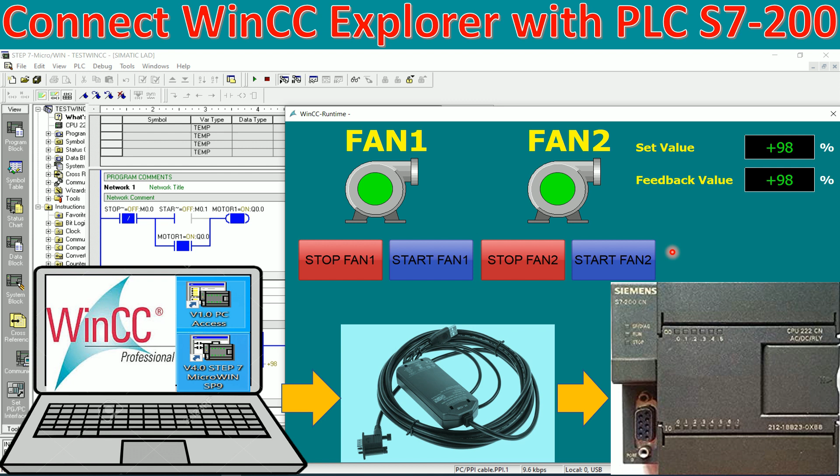So let's go to our software. I will explain more as we go step by step about how to create the project and how to create the OPC tag on the PC Access. Let's go together with me.

In the previous video, we already learned about how to connect the PLC S7-200 Smart with the WinCC Explorer, using 4 software. The first one is Step 7 MicroWin Smart, second is PC Access for S7 Smart, third is Kepware Server configuration, and the fourth is SIMATIC WinCC Explorer Professional.

But for this video, I will use only 3 software - this one is not used. So I will use Step 7 MicroWin version 4 SP9, the second one is S7 PC Access version 1.0 - this one not used, we use only with the PLC S7-200 Smart. So I will use these 3 software.

So basically we can go to create the project on Step 7 MicroWin. I will create the new folder, named Connect WinCC Explorer to PLC S7-200.

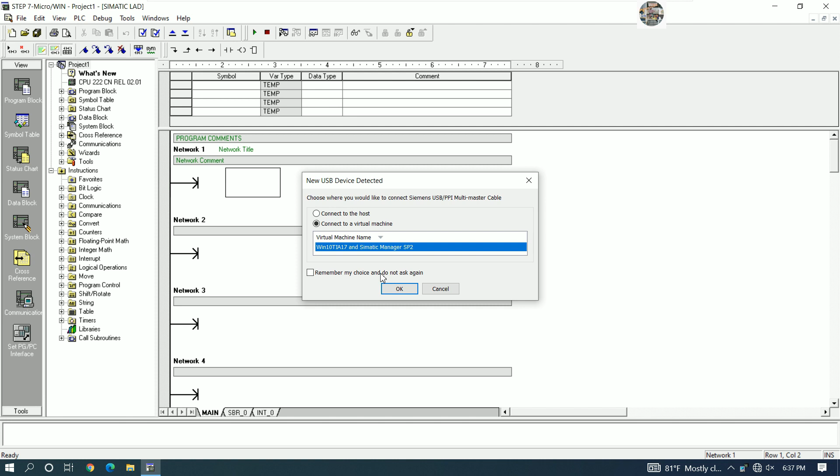Let's double click on Step 7 MicroWin version 4 SP9, and we need to check the communication between our PLC and software. So I will connect the PPI cable from the PLC to my PC. Then I will choose the virtual machine, because right now I use a virtual machine. Next step, we need to check the Set PG/PC interface.

Let's go to PC PPI cable, then go to property and choose USB - make sure we use USB. If everyone uses the COM port of RS232, we can also connect with the COM port, but for me I use USB.

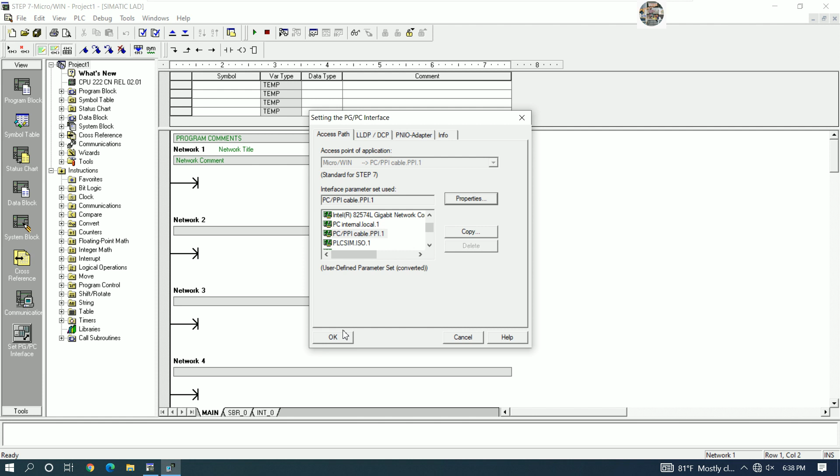Then click here to check the communication, double click to check the communication between PLC and PC. Right now it detects one PLC, CPU 222CN, version 2.01, address 2, and baud rate 9.6 kilobits per second. So that's okay for communication.

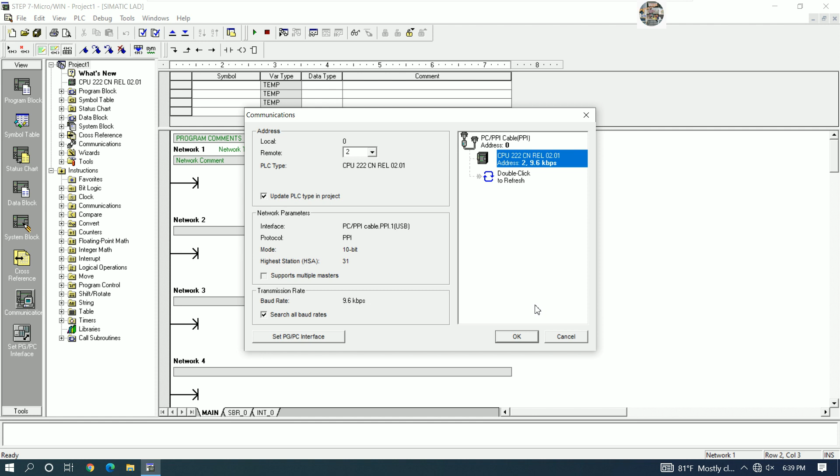Then we will create the sample project - sample start and stop the fan that I already showed here on the slide. We have two fans, fan 1 and fan 2, and we have stop fan 1, start fan 1, stop fan 2, start fan 2. So I will go to the push button stop fan 1.

So I will start from M0.0, and for start I will use M0.1, and for the output I will use Q0.0. I will hold the signal by Q0.0. We need to define the symbol for M0.0, M0.1, and Q0.0.

So for example, I will define the symbol as stop fan 1, and this one start fan 1, and this one fan 1. If we compile, it will automatically assign the symbol that we already put. So here is the fan 1.

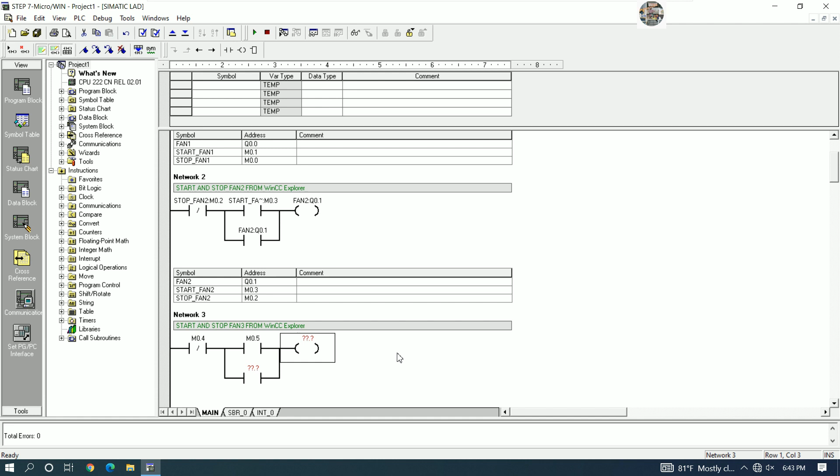So I will add until fan 3, yes, fan 3, so we can copy one more for fan 3. Okay, fan 3, so I will use NC, NO, coil, and one more for NO for hold the signal. So this one I will assign as M0.4, M0.5, and Q0.2, and this one Q0.2.

Okay, and we can remark the symbol stop fan 3, start fan 3, and this one fan 3. Okay, and we can compile. Yes, good, there is no error, right?

Then we have one more for set value and feedback the value, right? So we can also use the analog. Then we can use set point and feedback value.

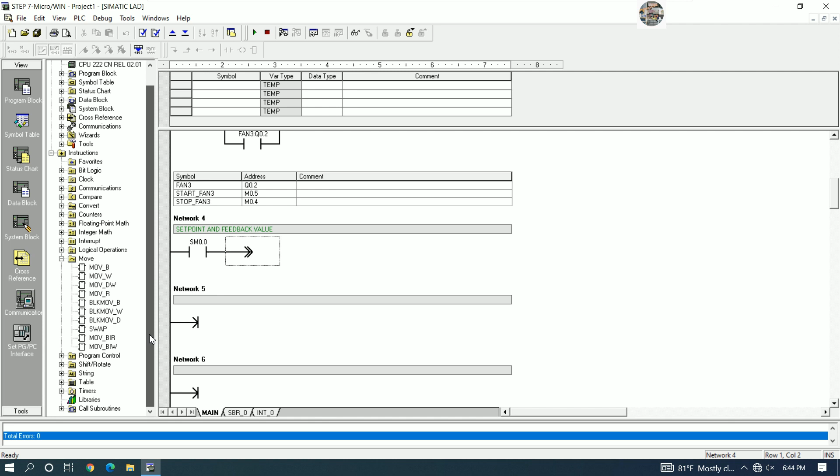So I will move. Basically we can use SM0.0 always on, yes, and then I will move. Example, I will move real, yes. For move real we can use MD10 to MD14, yes, example.

And this one we can define the symbol name also. Example, set value 1, and feedback value 1.

And we can also use the formula to calculate also, yes. Example, I use set value 1. Okay, let me delete first. We can use like this. We can use floating-point math.

Example, add real, yes. So MD10, multiply, sorry, add by MD14, and then the result is MD18.

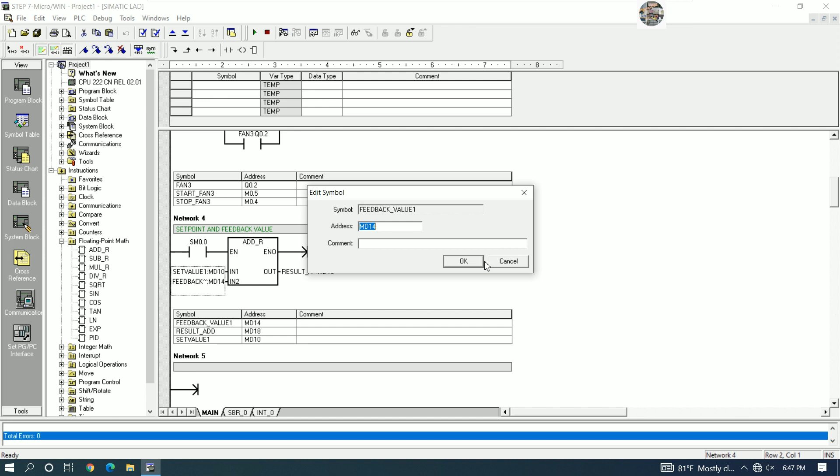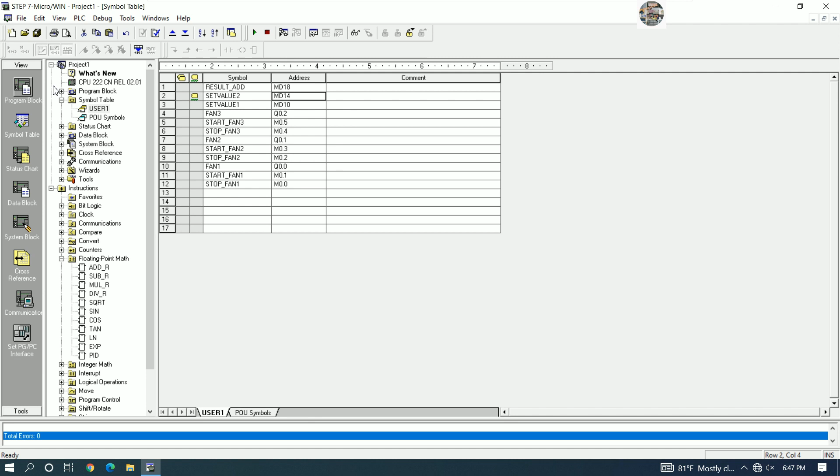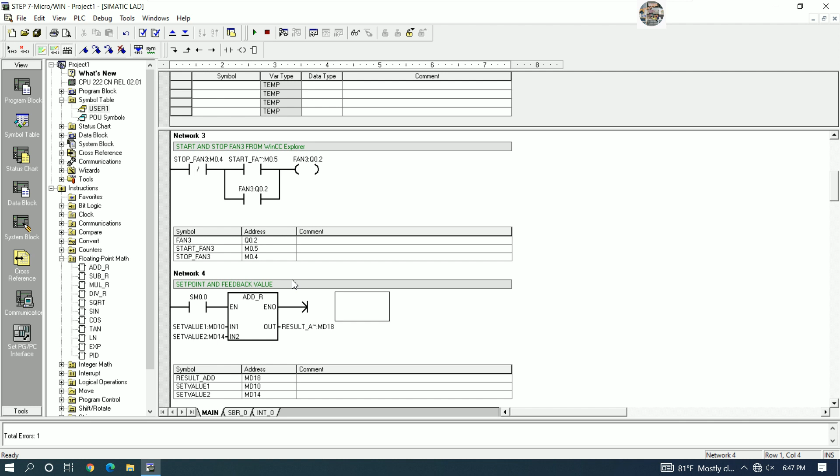Yes, and then we can go to compile, set value 2, yes. Then this is the result. So we have fan 1, fan 2 and fan 3 for digital control, and we have analog control also for set point 1, value 1 and value 2. Add and then we will get the result.

Okay, so we can save the project, and then save it to the folder that we already created here. So step 7 project.

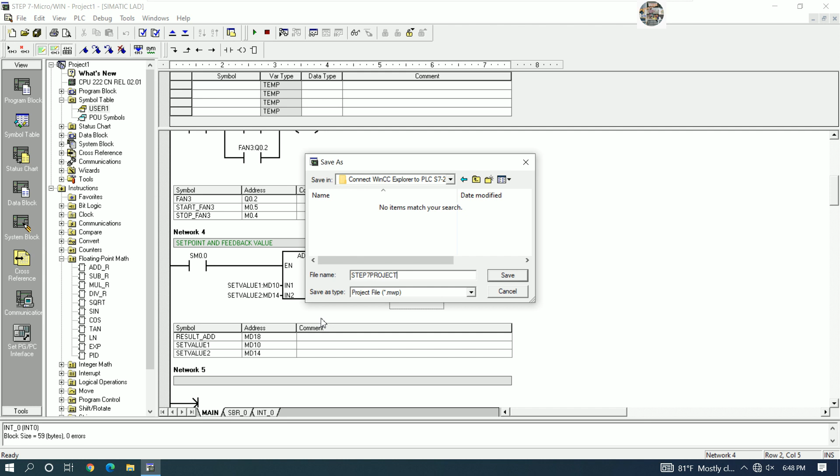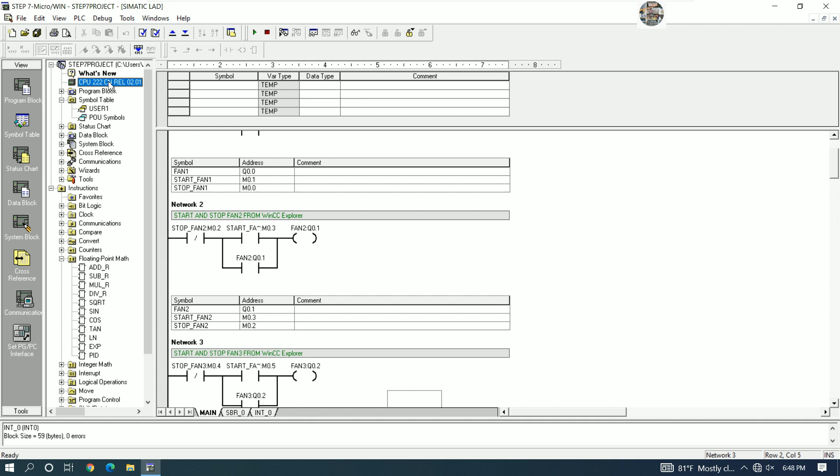Okay, and then I will download, yes, I will download to the PLC. Download this project to the PLC. But we need to change the language, because if we download like this, okay, I will show it will error because we use CN, yes, CN CPU, so we need to change the language to Chinese or China. Yes, so if I download like this, it will error. We cannot download, right? Here, error.

Then I will save the project and then go to change the language by go to Tool, Option, and then go to General and choose the Chinese language. Okay, so click OK, and then yes to save, and then we need to open project again to download.

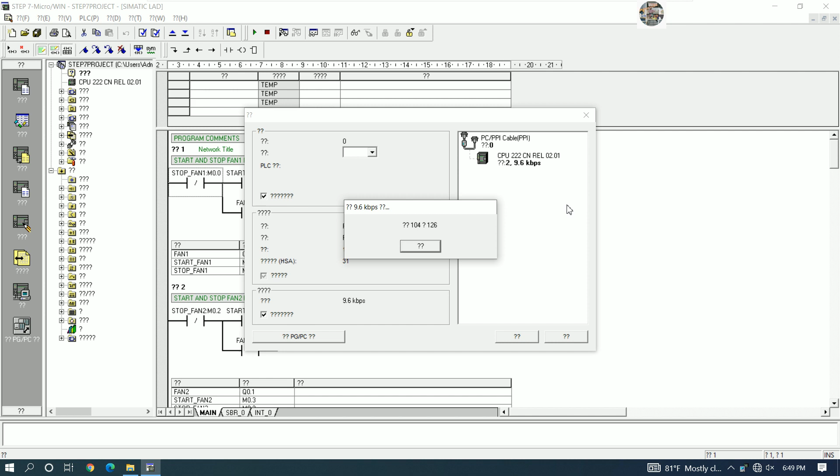Okay, it will come like this because we already changed the language. Yes, so I will try to check the communication. And then try to download to the PLC again. It will download successful, yes. And we can also start the PLC and we can online. Yes, can online. Okay, so good.

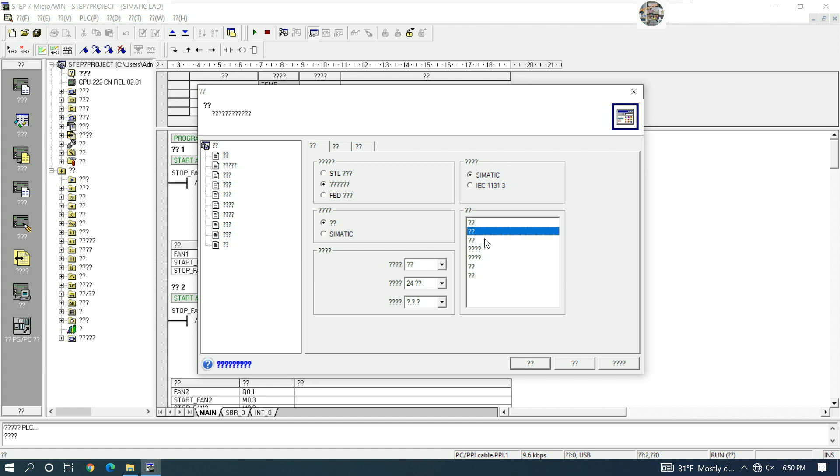And we need to open this project or import this project to the PC access, right? Okay, so I will close first and I will change the language to English. Yes, English, this one is English. Okay, save. And if we try to open again, we can online. Okay, we can online, but we cannot download. If we would like to download, we need to change the language to Chinese again.

Okay, so this is very important. If we need to download the project to CN CPU, we need to change from English to Chinese. Okay, and then I will turn off this one first, and then I will open the PC access.

Actually, we must run as administrator to prevent the security issue. Yes, and then I need to import the project from this project that we already saved here, to the PC Access.

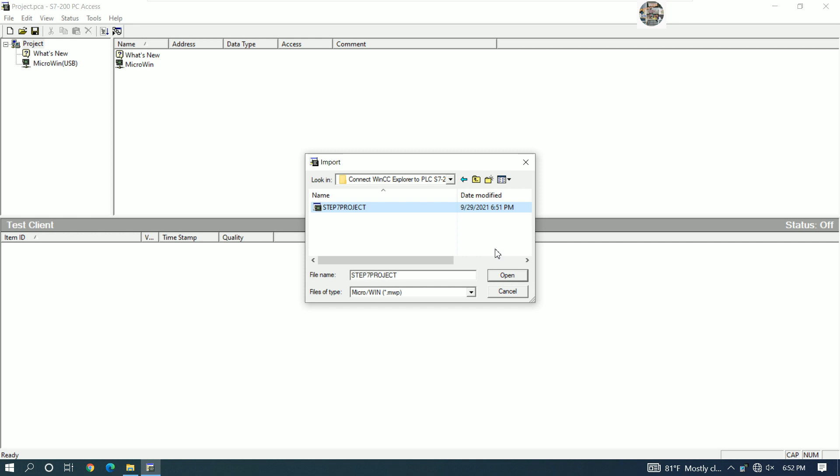Okay, so to do that, let's go to File, Import Symbol, and then go to the folder and this project that we already saved and downloaded to the PLC, and then open. We will get like this.

Yes, the symbol that we already defined. And if we try to go online like this, let me show you. If we try to online like this, okay, I will go online, it will error, right? Because we have not yet set the PG/PC interface of this OPC.

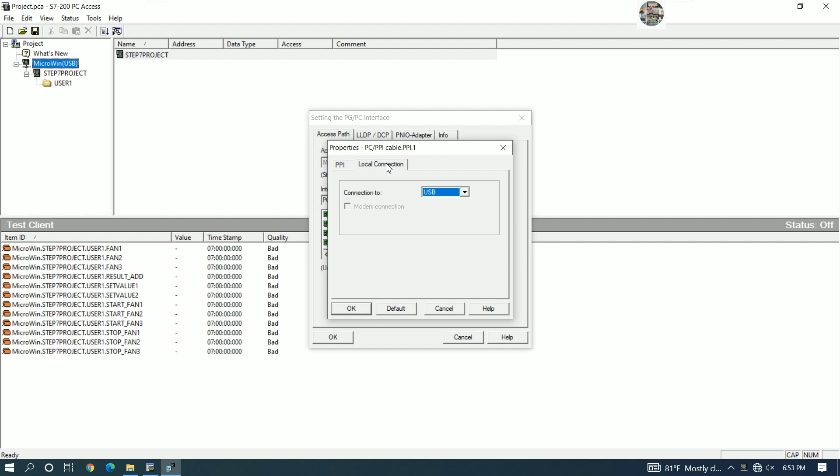So to do that, let's go to here, go to PG/PC interface, and then choose the connection. Yes, choose the connection here. PC PPI cable dot PPI dot 1 property. Make sure we select USB.

Click OK to confirm, and then I will save the project, and then keep it to the folder that we already created here. So this one, PC Access project.

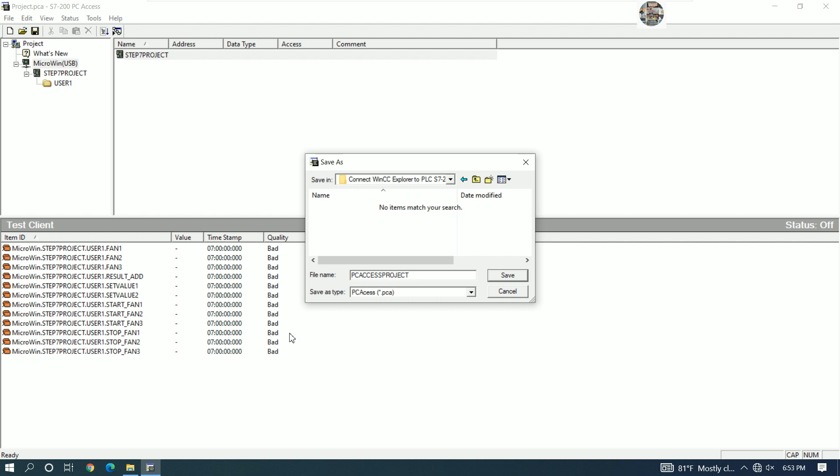Okay, now the project was saved to the folder, and then we can try to go online again. Okay, it's so like this. It means that we can connect it from the PC Access to the PLC, right? Let's see here, the quality is good. Yes, good for all the tags that we already created.

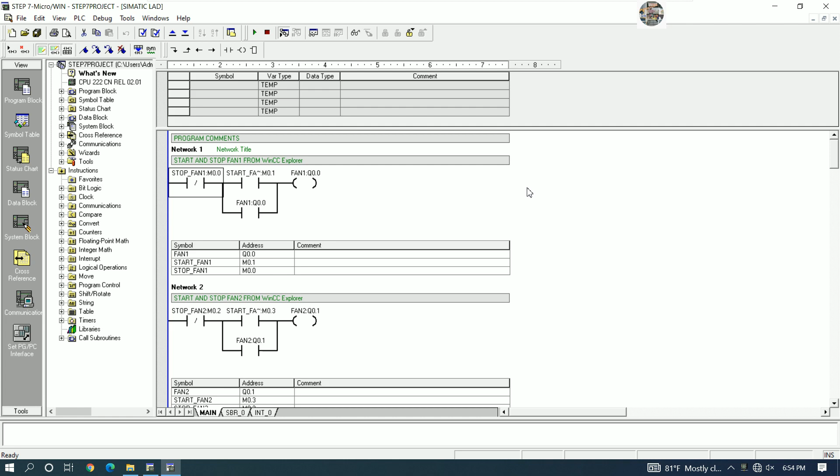So that's all for creating the PC Access project, and we can go online. This one. Yes, we can also go online. So okay, that's okay. Then we can go to create the WinCC project.

Yes, WinCC Explorer project. So let's open the WinCC project. I will create the new project. Choose the single user project, and then I will choose connect with PLC S7-200, and then browse to find the

folder that we already created on the desktop. Yes, this folder. Click OK to confirm. Click create the project. So wait a moment for creating the project.

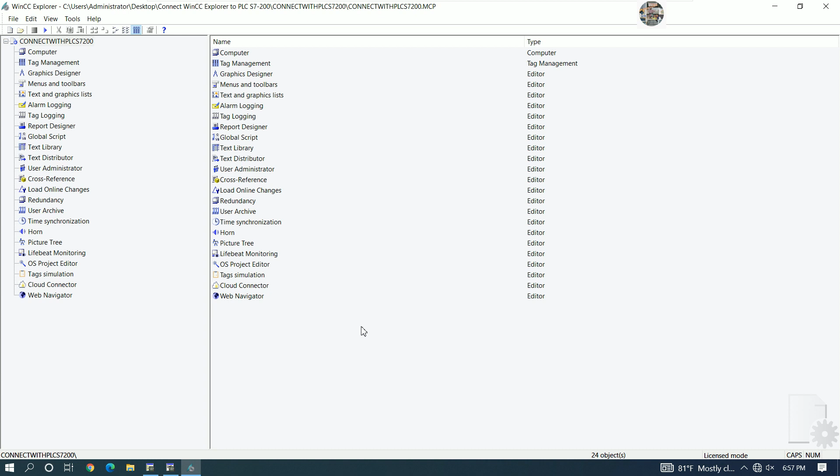So next step, we will create the tag management. So let's go to right click and then open the tag management. And then we need to create the connection, right? So let's go to right click on tag management and then add the new driver.

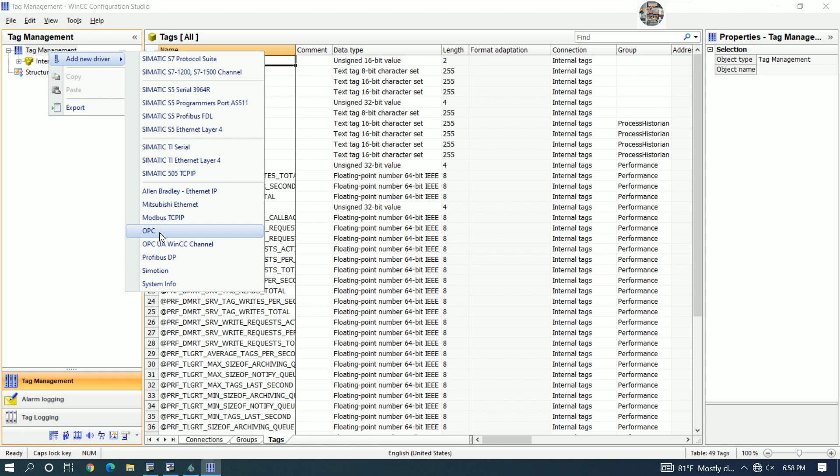And then we will choose OPC connection. So click OPC, and then we will get like this. And we need to right click on OPC group and go to system parameters, and then it will search the OPC connection automatically.

So wait a moment for searching the OPC server. It takes a little time to search for the OPC server connection. Okay, so right now it finished searching, and then we can go to local.

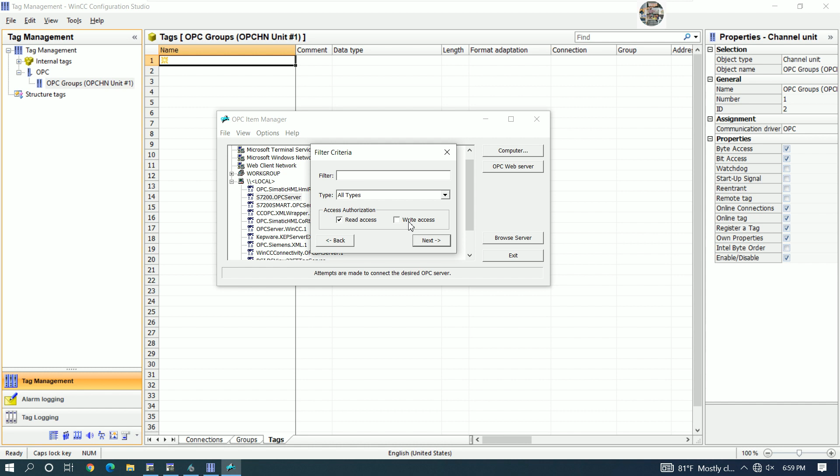And then go to S7-200.OPC server, yes, here, and then choose browse server. And then check the box on for read access, write access. And then go to next.

And go here, MicroWin Step 7 project. It is the project name of this one. Yes, of this one. Let's see here, Step 7 project. Yes.

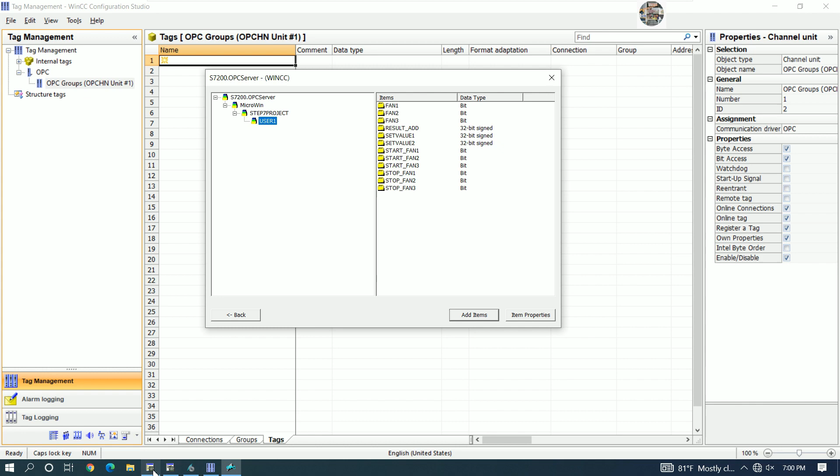And then we can go here, user 1, this one. We have this tag that we already created, right? So this tag here, yes, we already created and imported to the PC Access project, and the quality is good.

Then we can select all like this, and then add item, yes, to confirm, and we need to put the name. Yes, I will use this name as default, and then click here and click finish. Okay, so right now the connection is already added.

Yes, so I can go here, close, exit, and then let's check here. We will get the tag. Yes, our tag that we already created. Okay,

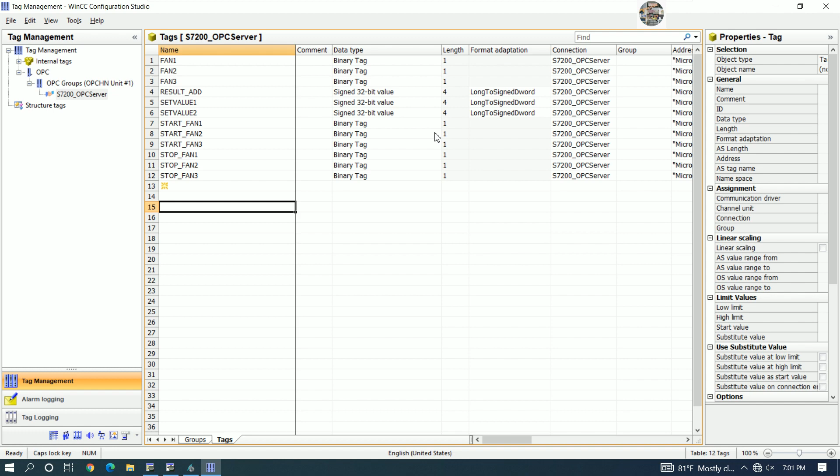so let's go to create the screen. Right now the tag is already created. So let's go to WinCC and then go to Graphics Designer to design the screen here like this.

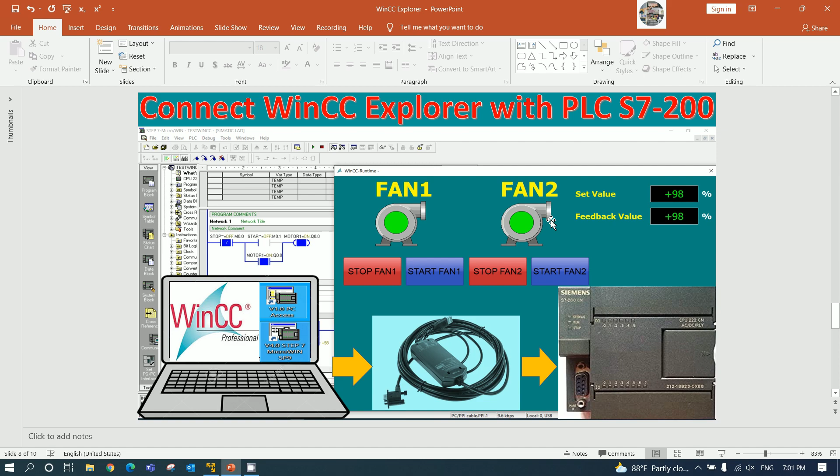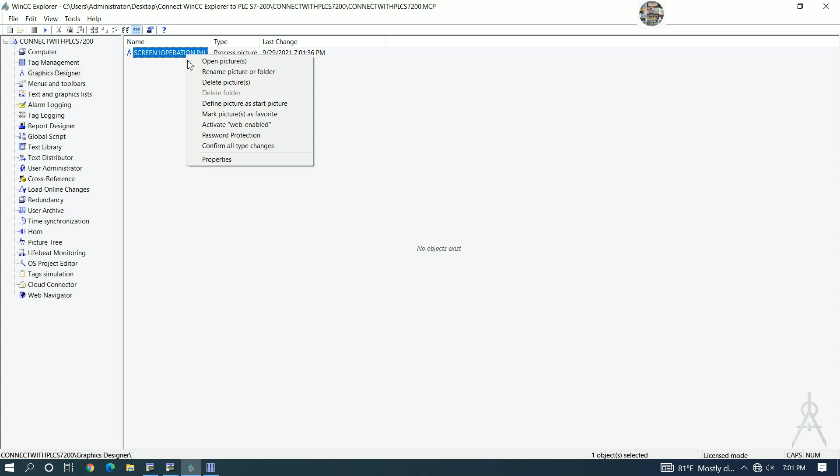So right click, I will create the new picture. So I will rename this one to be Screen 1, Screen 1 operation. Yes, and then let's right click and then go to open the picture. So wait a moment for the graphic designer to open.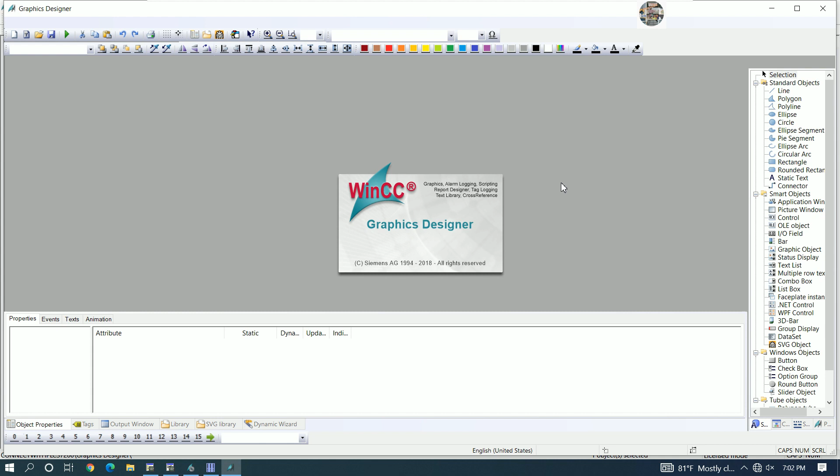So it's very basic. If we can create like this, we can also create another option that we want to connect with the WinCC Explorer. Yeah, it is SCADA operation. Then we can go to set up the screen that we want, the screen size that we want.

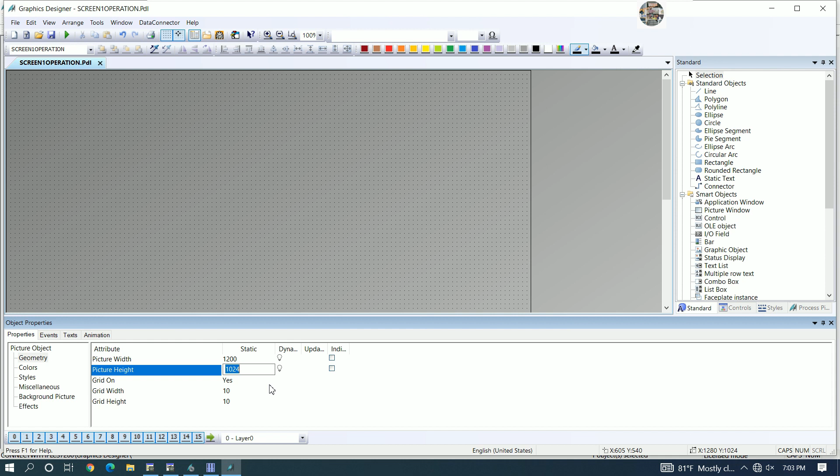Example, I will create only 600, or 1000, sorry, 1200. Okay, and for the height I will set only 500. Yes, like this. We will get 1200, yes, and height is 500.

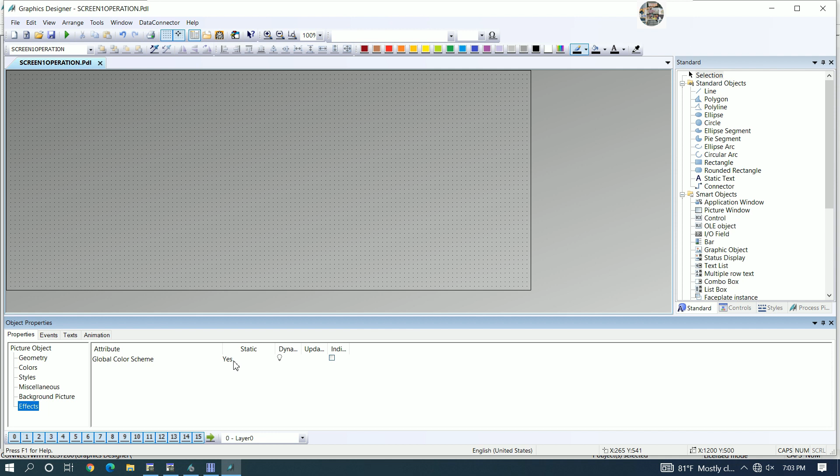And I need to change the background of the screen. So basically, if we put like this, we try to click another color, we cannot change, right? So don't forget, go to effects and then choose this one with no, so we can change the color of the screen that we want. Okay, so I will choose the color that I like, this one. Yes, I like this color for my background.

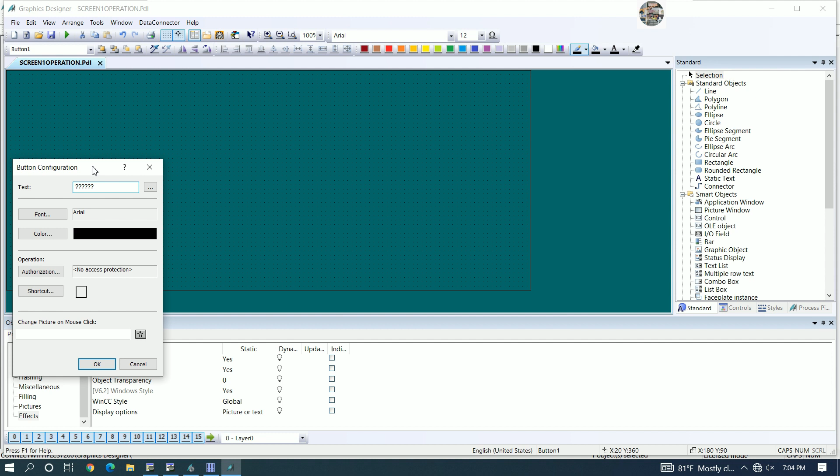And then we can insert the motor fan or create the button. Yes, push button. I will find the push button here. Okay, so example, start or stop fan 1.

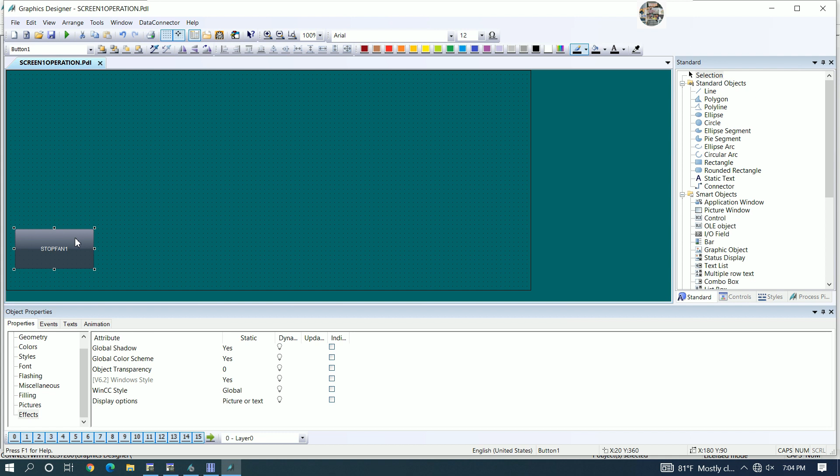Then we can change the background, the same as the background of the screen. If we try to change the color, we cannot change, right? Cannot change. So don't forget, go to effects and then choose no, so we can change the color and change the size that we want. Okay, so example, stop fan 1.

Push button for stop fan 1, and we can adjust by push on keyboard. Click on keyboard shift and arrow key, so we can rotate or adjust the position of the button or of the objects.

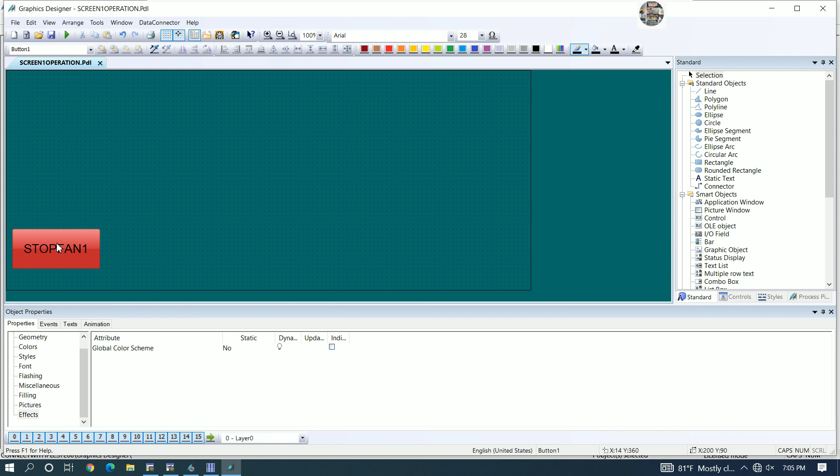And then I will duplicate, yes, for start fan 1. So start fan 1. Okay, and I will change the color to be blue for start fan 1.

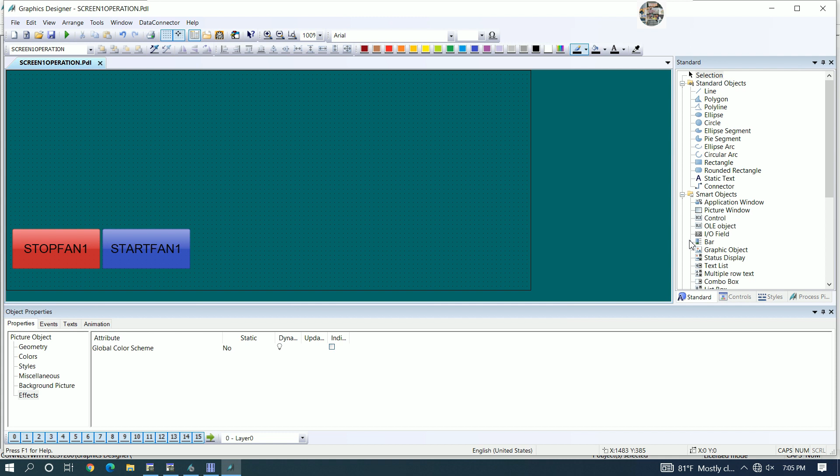And then let's go to insert the fan 1. Yes, so I will go to insert the picture. Yeah, here Siemens HMI symbol library. So I will choose fan 1.

So we can change many style that we want. Have another style of model that we want, so I will use this style. And then I will put the name of the fan. So I will go to the static text and write fan 1.

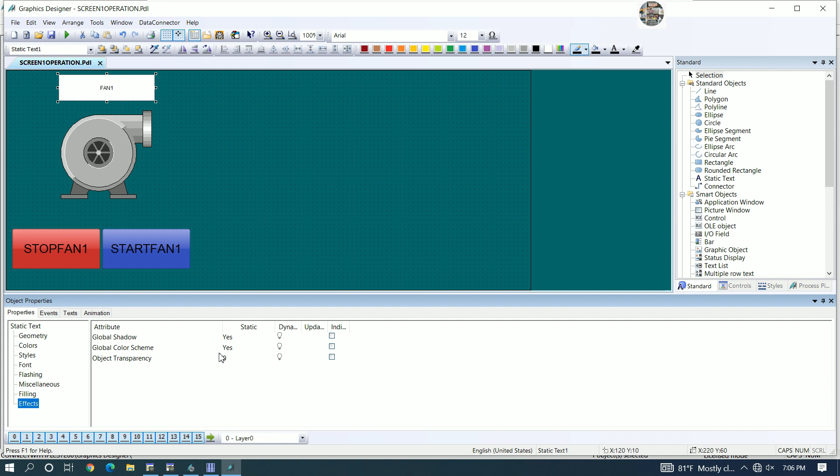Okay, then I will go to change the option to be central and central. Yes, and don't forget change this one to no. Okay, like this. And I need to use the yellow color. Yes, okay, fan 1.

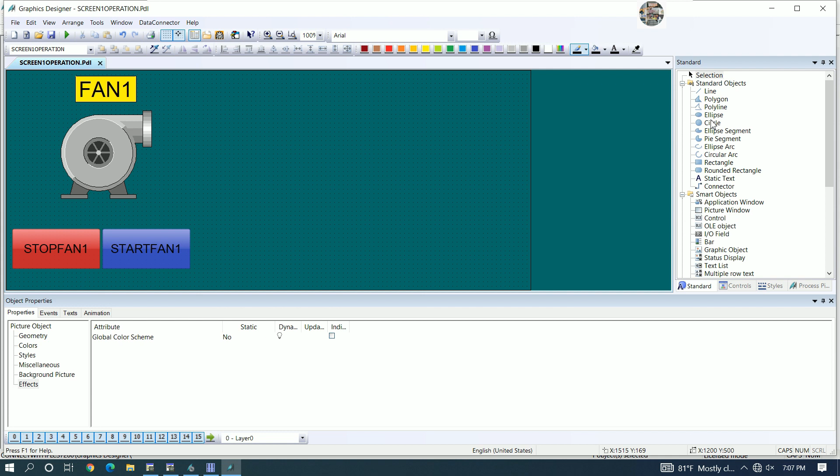Then I need the circle to show the status when we start fan 1. So don't forget, go to effects, change this one to no, and change this one to this color, red color.

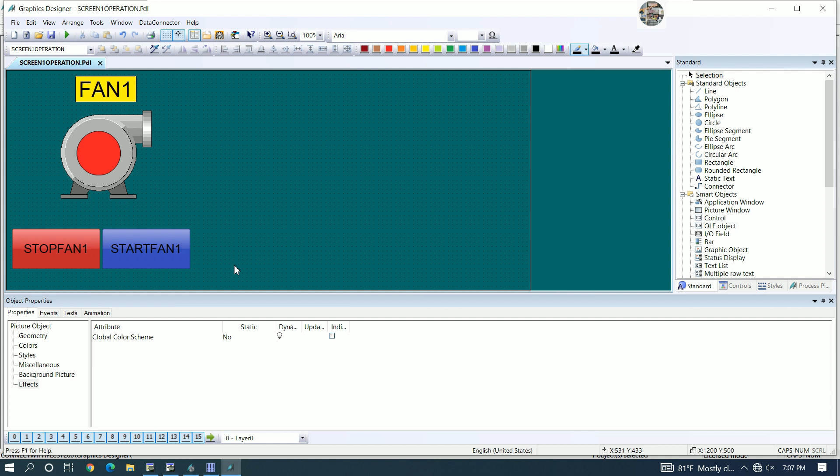And then we can copy for fan 2 and fan 3. Yes, duplicate. Fan 2. Yes, okay, I will rename this one to fan 2. Yes, and this one to stop fan 2. This one to start fan 2, sorry.

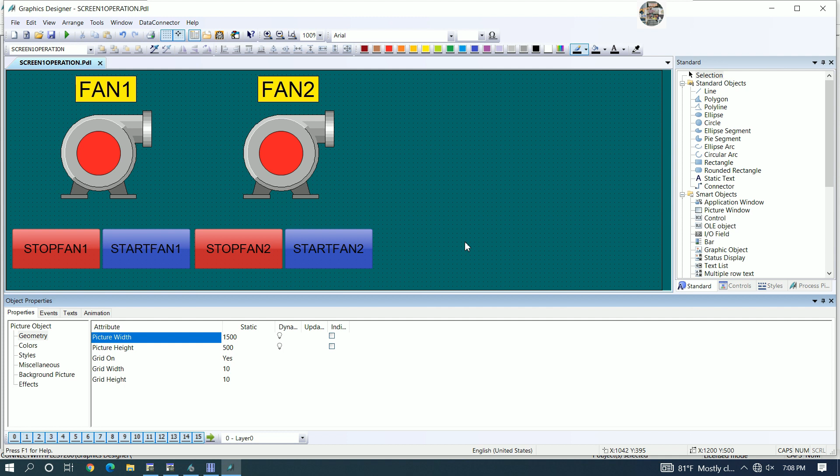And I need to adjust the geometry more, 1500. Yes, and then I can copy for fan number 3. Yes, okay, we can adjust fan number 3. And then we can rename this one to fan 3. This one stop fan 3.

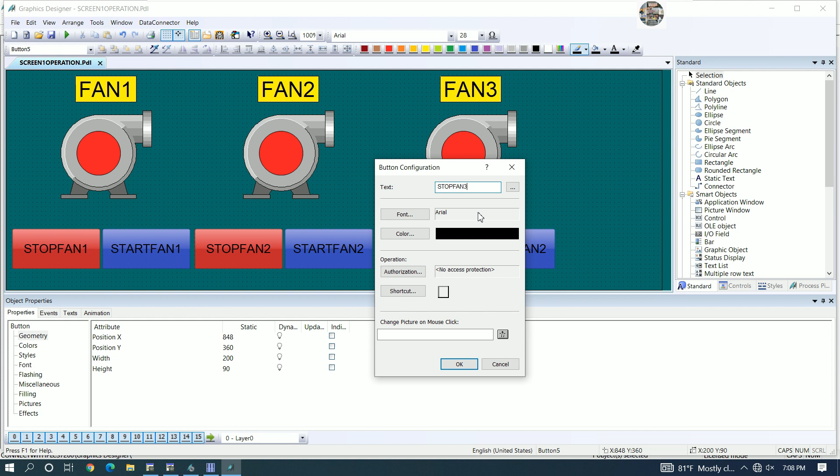We can use another style that we want, so this is just basic. And then we have add function, right? Value 1 add value 2 equal result, right? So I will put the I/O field here.

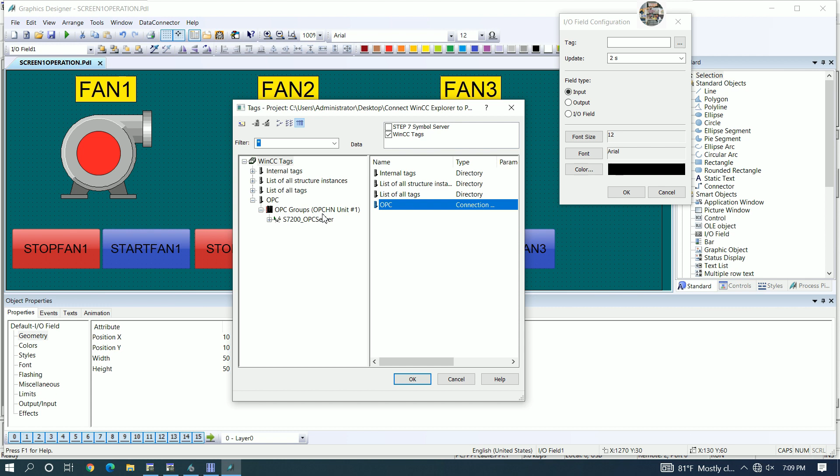So value 1, it is the input, right? Input we can click and then we can change. If we choose output, we cannot click and change, right? So I will use OPC tag and then use set value 1, change to upon change, and we can adjust the size.

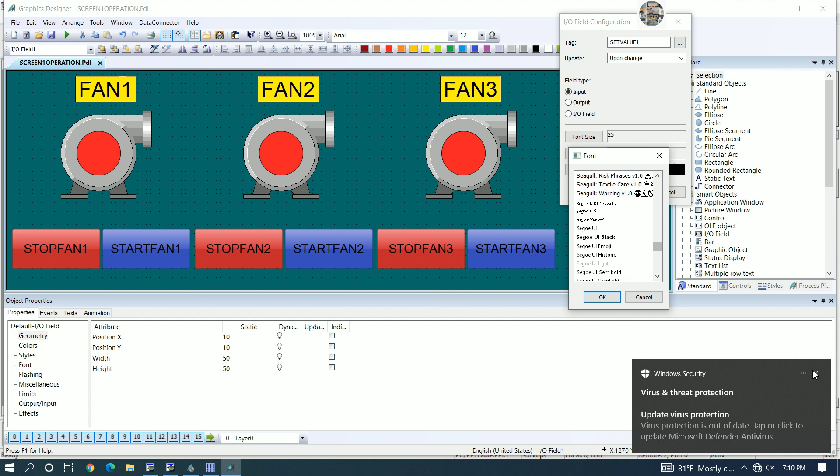Yes, example, I adjust to 25, and the font I will use Tahoma. Yes, I like Tahoma. And color I will use green. And for the background, I will change this one to be no.

And then I will change the font size to be 35 and use center, yes. Okay, so this one is value 1.

And for value 2, we can duplicate. We can also change, yes, the font style. Example, I will change to bold. Yes. Okay, and then we can change this text to be, go to property and change this text to be set value 2. Yes.

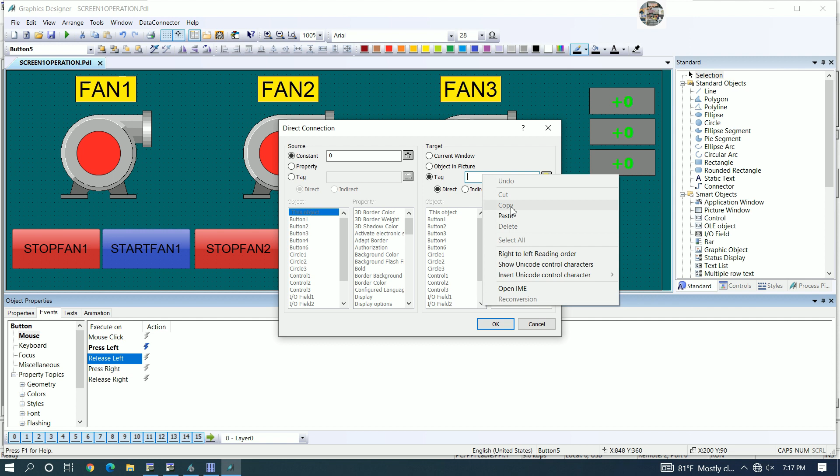Okay, edit to 0, paste, okay, to confirm. And for the start, we can also use the same procedure. Choose the start fan 3. Yes, and we can copy and release, can go to 0, take paste.

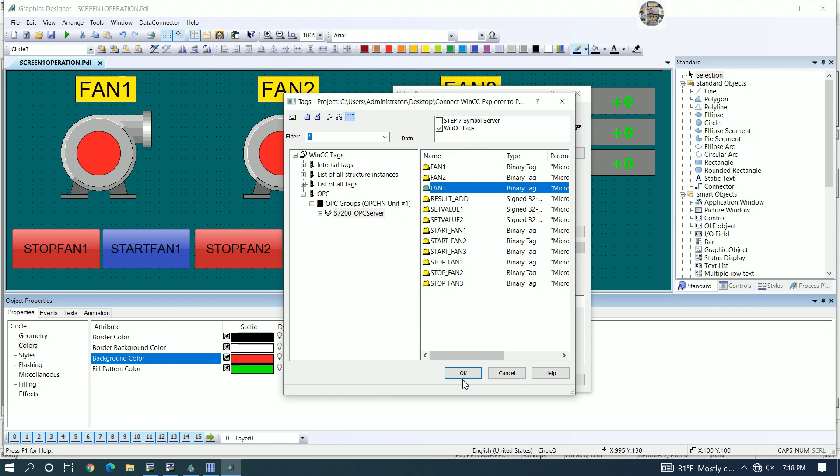And for the animation, go to property, color, go to dynamic dialog, go to fan 3, boolean, change this one to green, and go to text, change this one to upon change. So that's okay, that's all.

Then we can go to test with me together. So before test, let's go to property, and then go to property again, go to graphic runtime, and choose the screen that we would like to run when the WinCC Explorer activated.

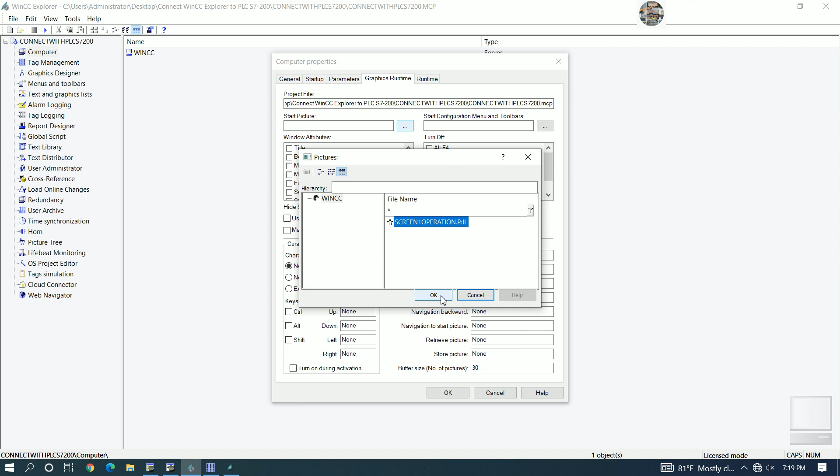Okay, so I will do title, border, maximize, minimize, full screen, scroll bar, status bar, and adapt picture. Okay.

Okay, one more time, and then we can activate the project. Okay, and then test together. So take time a little bit for activating the project. Wait a moment more. Not yet finished. Okay, so right now finished.

So we can test together. Okay, I will adjust this one a little bit. Okay, this one a little bit more. Okay, like this.

So let's go to motor 1, then I will push start motor 1. Okay, motor 1 is running, and the PLC is showing the signal also. Motor 2.

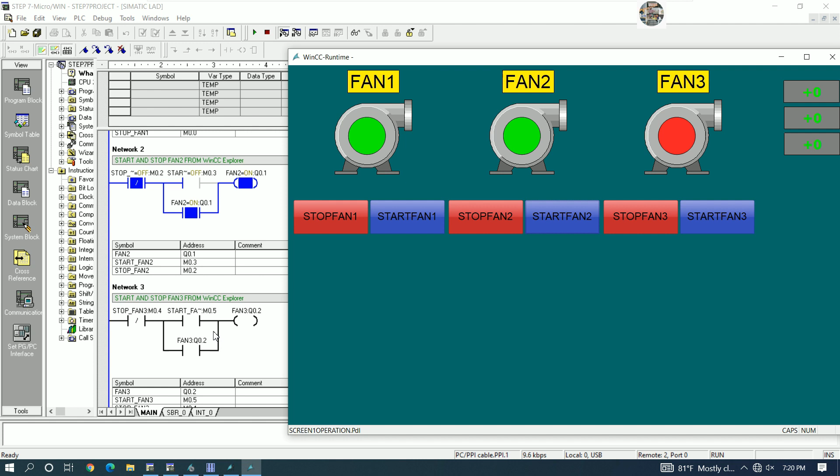Okay, start. Let's see, the output is turned on, and motor 3 start. Okay, turn on. And then for the analog signal, we can also test.

Right now it's 0, right? So I will try to 10. Oh, this one. NaN, right? 10.0, 10.0. Oh, we need to put the real value.

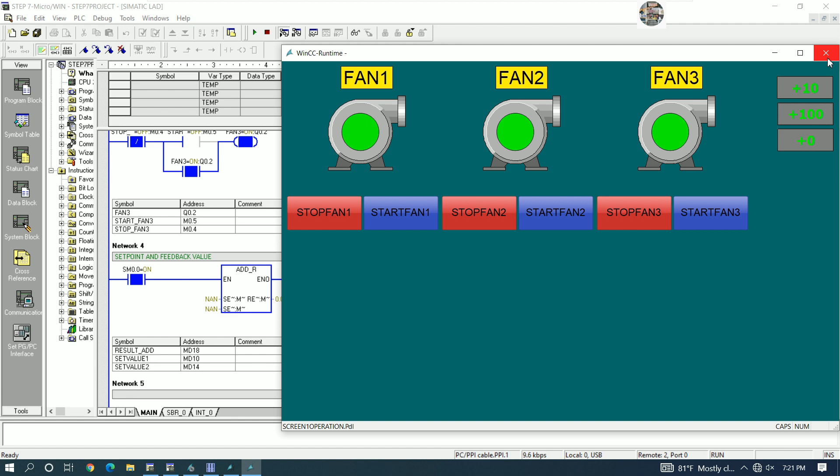Okay, let's go to correct this one a little bit. IO, go to customize configuration dialog. I will use I/O field. So this one should be okay. Let's test again. I will change to I/O field, then test again.

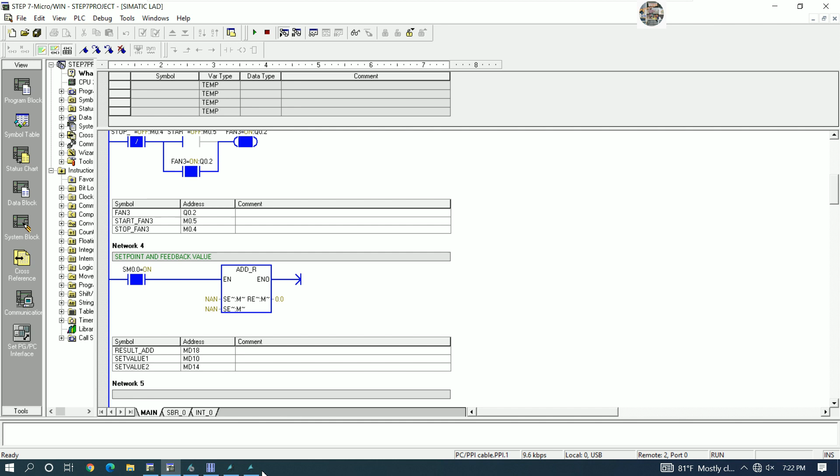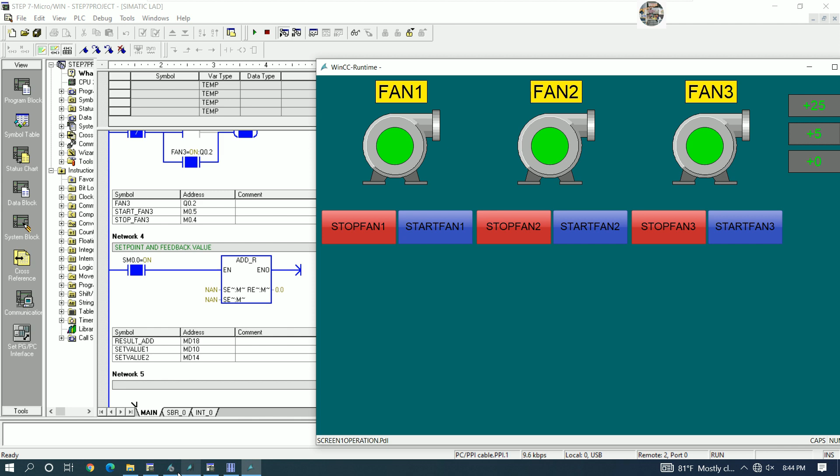Okay, we cannot write, right? So if we try to set point, example 2.5 something, it cannot get the data from the WinCC, right? Yes. So to clear and solve the problem, let's go to see. The data type that we assign here, it doesn't correct, right? We must assign to be real value.

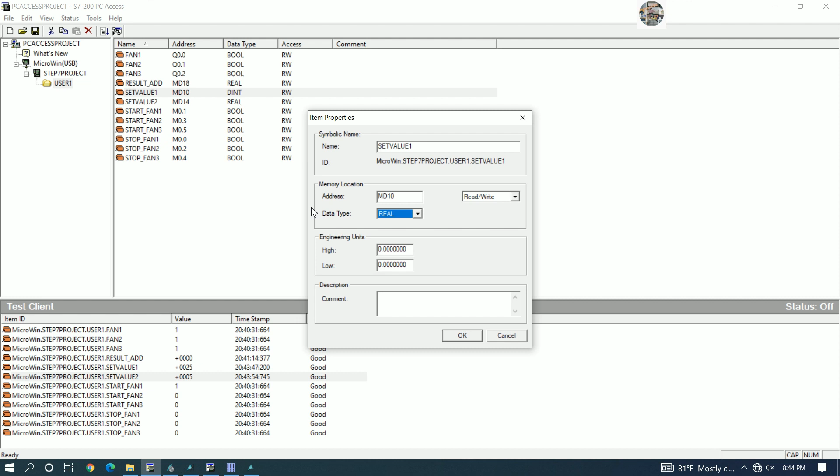Okay, so I will offline first, and then I will change to real. This one change to real. So be careful if the data type is not correct, so we cannot do something.

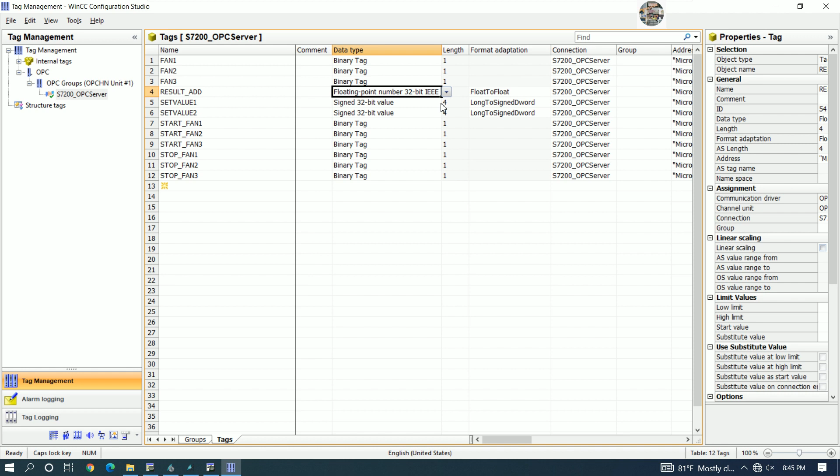Yes, and then if we would like to save here, we cannot save, right? Because the server is running. So I will close first. And then I will change this one to be floating point, 32 bits. Okay, for the address is okay.

And then we can close it, and then we can deactivate the server, deactivate the WinCC Explorer. And then let's go to PC access, and then we can save. Yes, and we can run the server again. Okay, so it comes to real value.

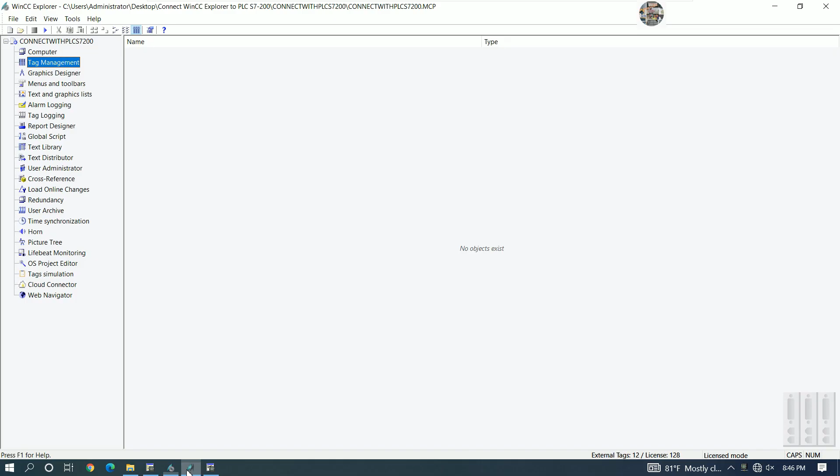And then we can go to WinCC again, and then activate again. Okay, wait a moment for activate. Okay, and then we can try again.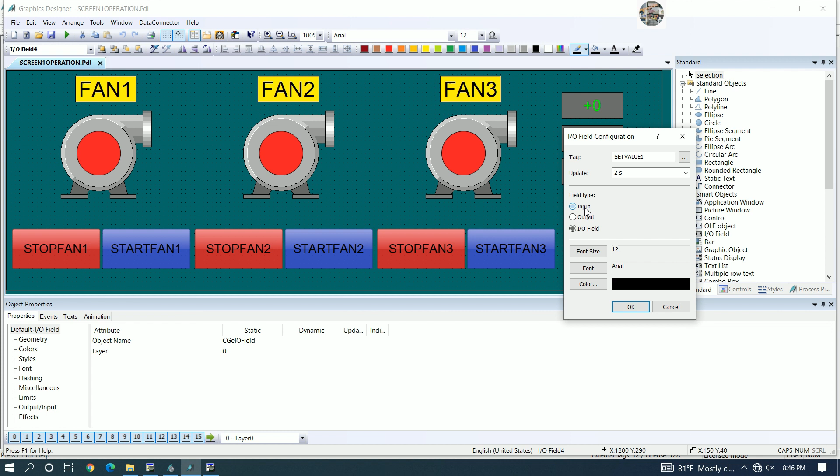I can change the screen to be like this format, right? Okay, I will go to this format. It is input, right? Okay, and then I can copy from this format to here.

Or we can change like this: 999.9, 999.9, 999.9. Yes. And then we can save the screen and then try to run the screen again and test again.

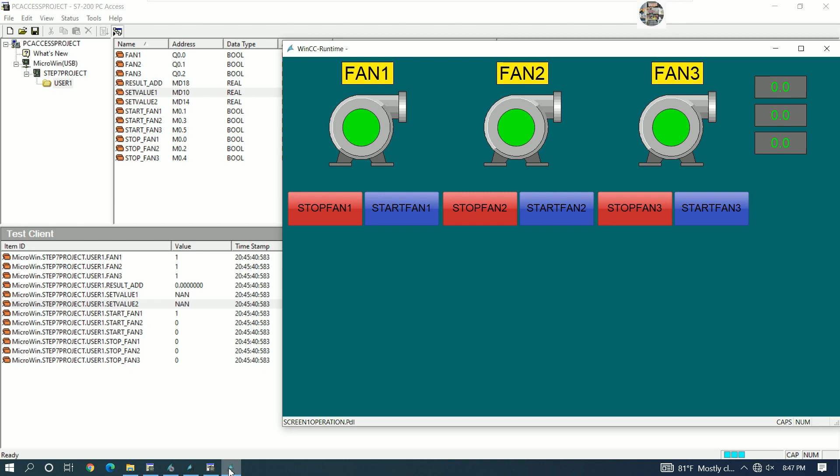Okay, so basically I will change the data. 36, example 12. Okay, 12 plus 36 equal 48. Okay, that's correct. 100. Okay, 100, 100 equal 200, right? So that's correct. So if we use the analog or the real signal or real data type, please be careful about the data type. We need to assign to be correct the data type, otherwise the value is not correct.

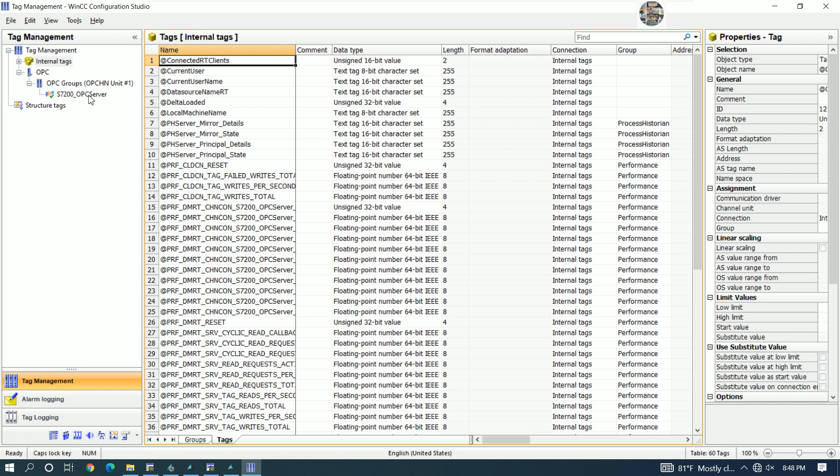Okay, and one more, for tag management we can also check, yes, after import from the OPC server.

So I will review again, start and stop, and then let's see the PLC status together. Okay, so example this one I will put value 1, right? Example value 1. Yes, so value 1.

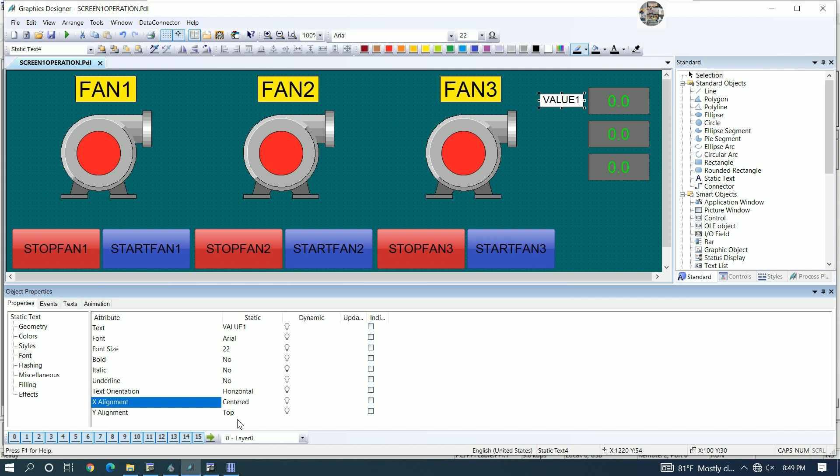I will change the size. Yes, okay, and change the alignment. Centered. Yes, and for this one is value 2, right?

So we can duplicate for value 2. Yes, we can change this one to value 2, and this one is the result, right? So result, and we can alignment. Okay, this one we can alignment also. Okay.

So save the screen and then run the screen again, and we will review and start and see the status on PLC together. So right now fan 1, fan 2, fan 3 and value has shown on the screen, right? So I will show the status, the actual status on the PLC.

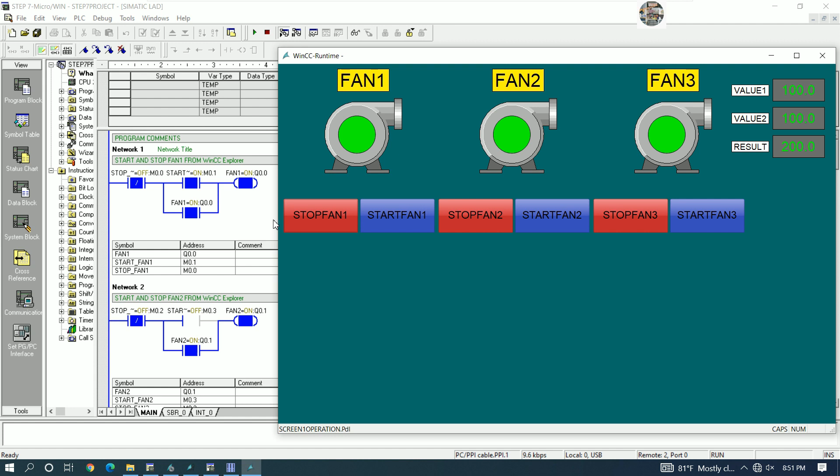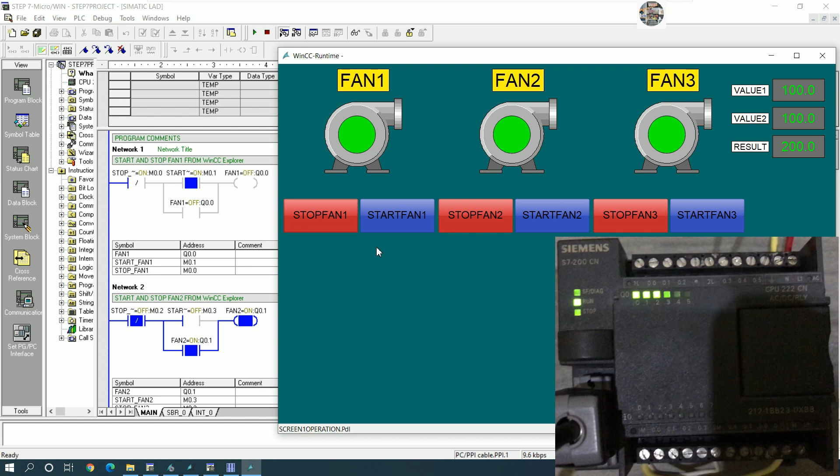Okay, so right now the output of PLC is turned on 3 bits, Q0.0, Q0.1 and Q0.2. Okay, so if I stop the fan 1, okay, fan 1 stop, fan 2 stop, fan 3 stop, fan 1 why not stop?

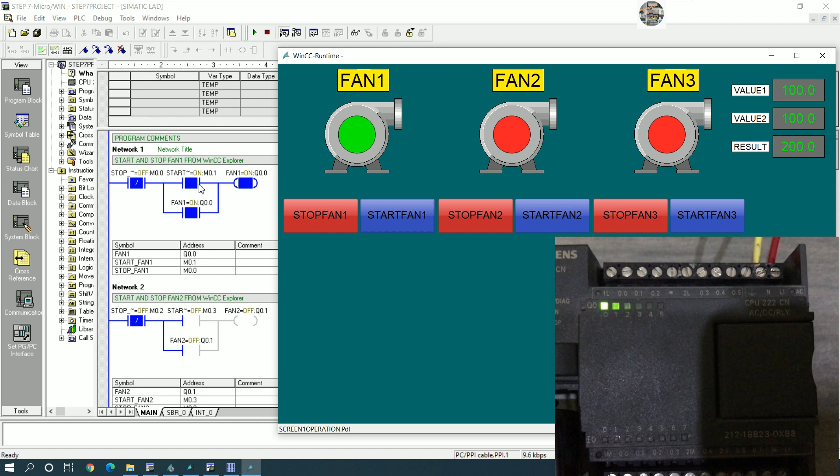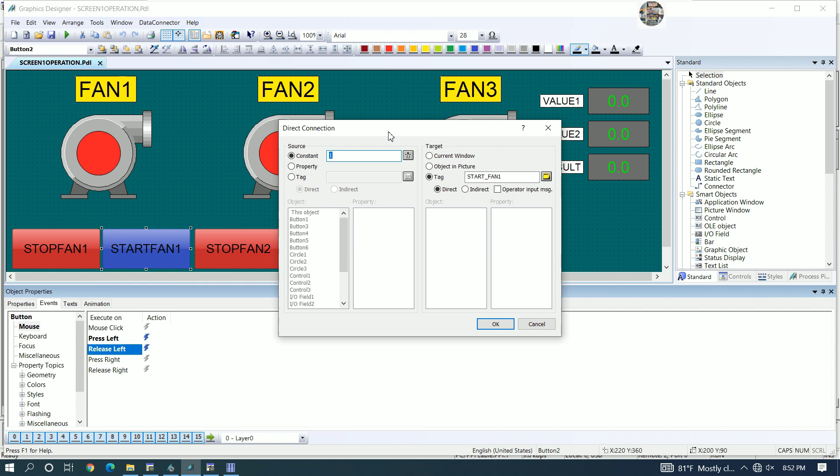Oh, because this one is not reset, right? So let's check this one a little bit. So let's go to screen again and let's see the start, events, mouse. This one release, right? Release, this one should be 0, okay? And then save again and then run the screen again, and then we can test again.

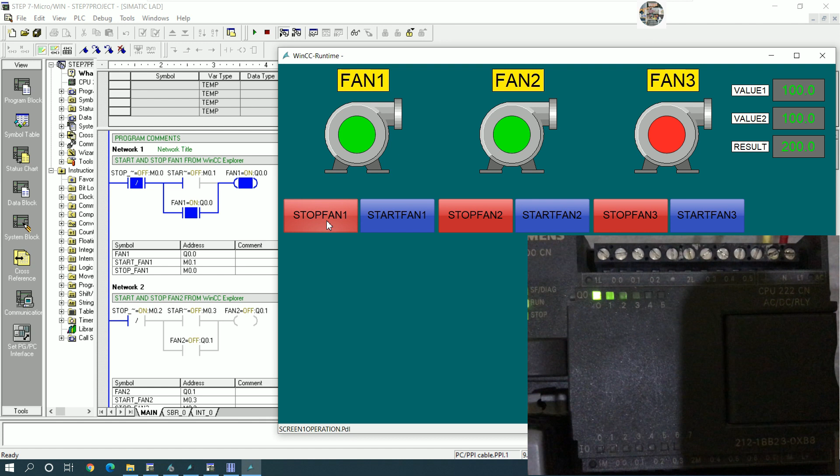Okay, so I will stop fan 1 again. Okay. Okay, fan 1 was stopped. And then I will start again. Start fan 2. Start fan 3. Yes. Stop fan 3. Okay. So it worked perfectly.

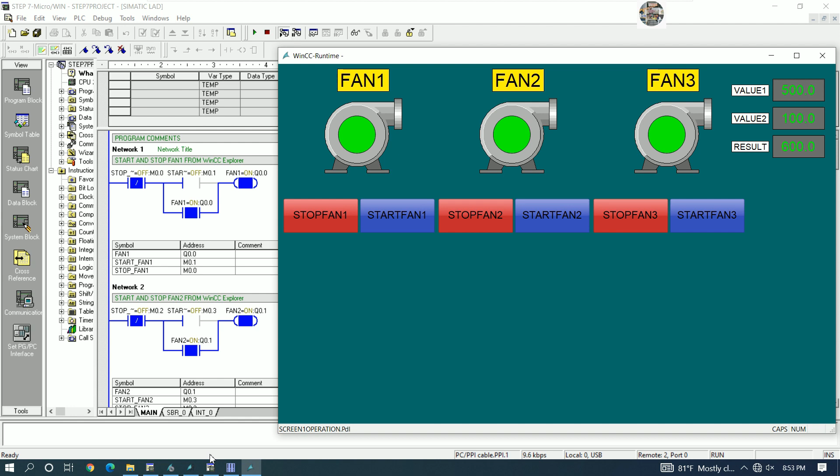Change this one to 500. It equals 600, right? So this is just basic about how to link the WinCC Explorer SCADA to the PLC S7-200 by using the Step 7 MicroWin and PC access, yes, S7 PC access software, by using the WinCC to design the screen of SCADA to control the PLC.

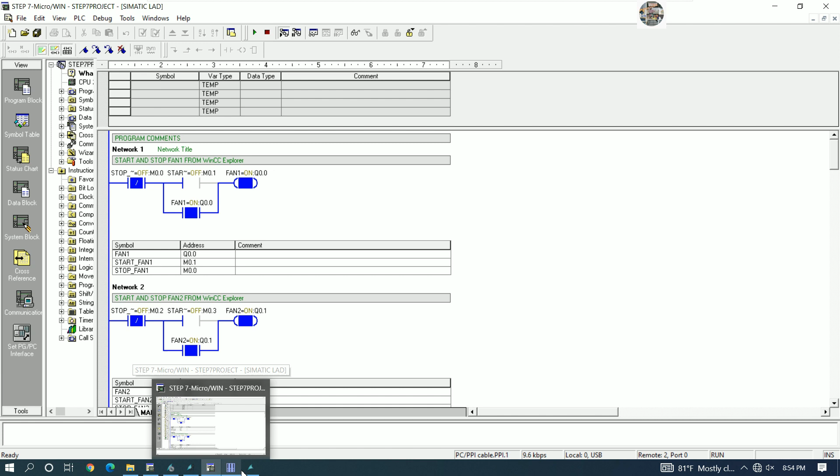Okay, so I hope everyone will understand because I go slowly to create the project and also create the screen.